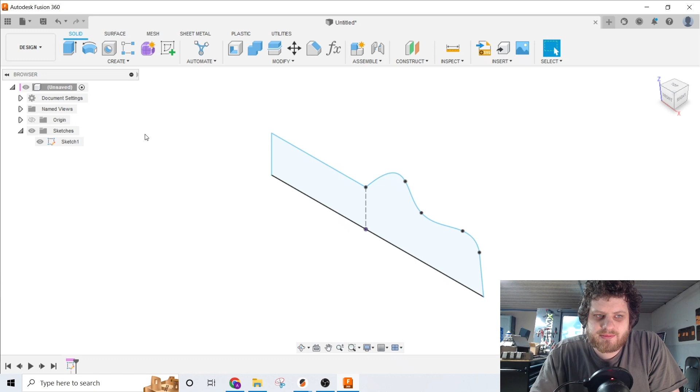Hey everybody, this is the Revolve button, and this is what it does. In short, the Revolve tool takes a two-dimensional sketch and rotates it around an axis to make a round shape. When you first pull up the Revolve tool, there's only a couple different options that you can choose from, and today I'm going to go through every single option that the Revolve menu gives you.

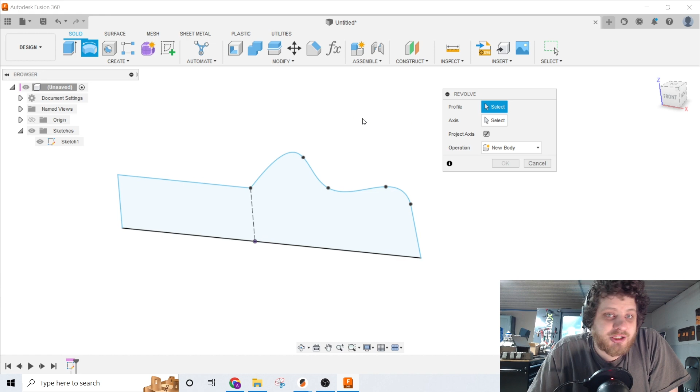So first of all, you need to select a profile. In this case, a profile is just a fully enclosed sketch. You can tell if your sketch is fully enclosed because Fusion will shade it this light blue color, and when you hover over it, it'll turn dark blue. To select your profile, you can just click, and you can also select multiple profiles if your sketch happens to have them. Then you need to select your axis that you are going to rotate your sketch around to make

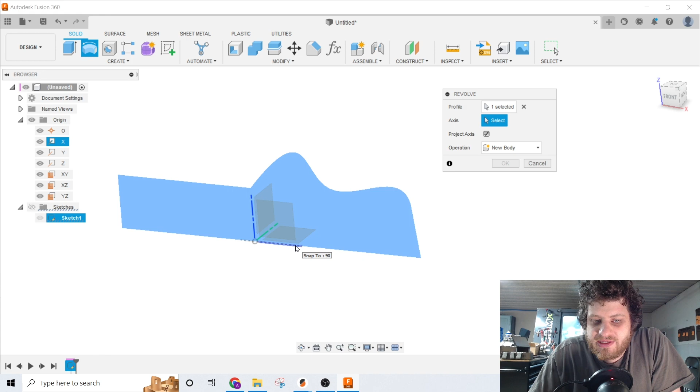your spun profile. Now this axis can either be a line within your sketch, like this example here, or it can be a piece of construction geometry, like this x-axis here from the work coordinate system, or you can even choose an axis from an existing piece of geometry, like a cylinder. Now your axis does not need to be touching your profile. In this example, you can see we have our axis down here, and since it's not touching our circle, we get a really big donut.

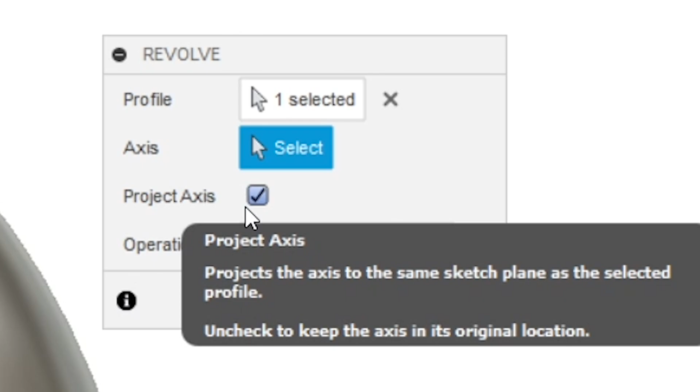Our next menu option is this little checkbox here that is labeled Project Axis. And this can be a little bit confusing at first until you see it in action. So if we look at this little donut I made here and we look at it from the side, you can see that the center axis is right in line with this plane that's defining our little circle there. So the circle and the line, the center axes are all lined up.

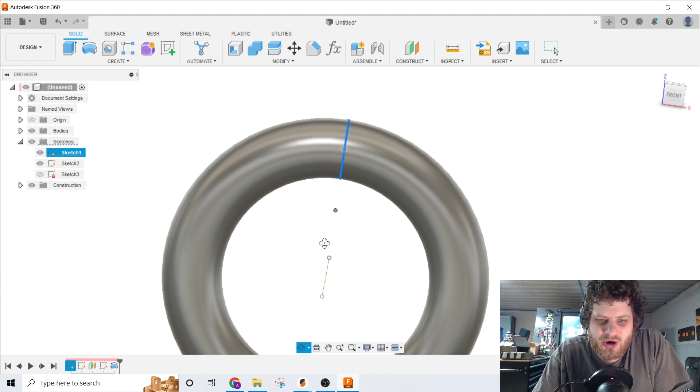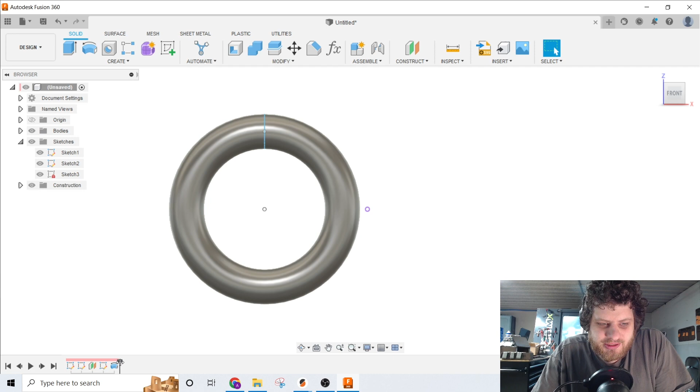So if I were to do a new revolve and I uncheck the Project Axis button, and I'm going to select this little line right out there as our axis, you can see that it made a much bigger donut, and also the cross section of that donut isn't quite round. But if I go back and delete this first revolve here, and do the exact same thing again with the Project Axis button checked, you'll see that I have my same original donut.

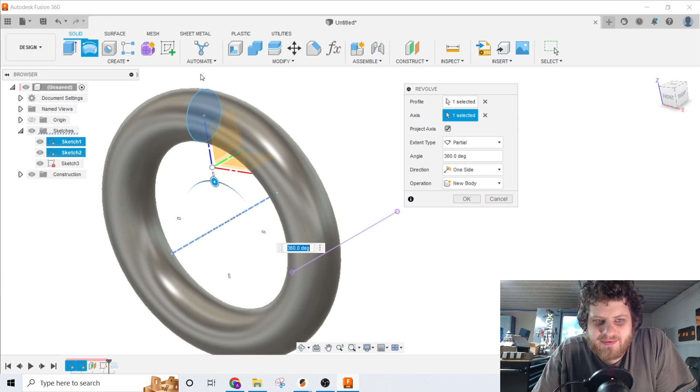If you have the Project Axis checkbox checked, it will move your axis line to be lined up with your profile sketch, as if they were drawn in the same sketch or on the same plane, like my original example here. Now this Revolve feature can do more than just adding more material to your model. It can also remove material.

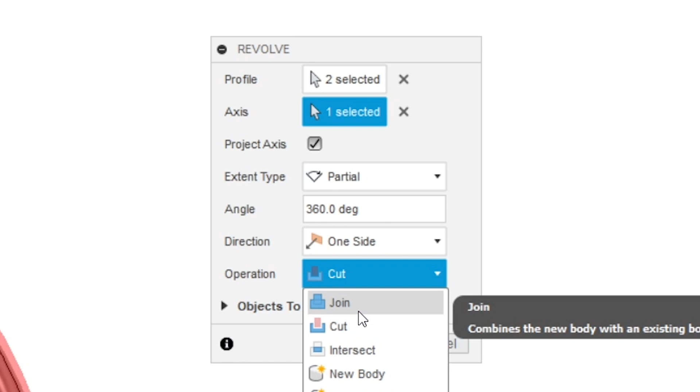So let's say we wanted to put a little groove in our donut here. We can select that profile I just made and then the same center axis. And down here, it'll pop up some more menu options, and we can select cut instead of join. And if we select cut, it'll cut a little groove into our donut. If we wanted to add material to the donut instead of removing the material, we can hit join, and you can see it'll add what kind of looks like an O-ring around the outside of our donut.

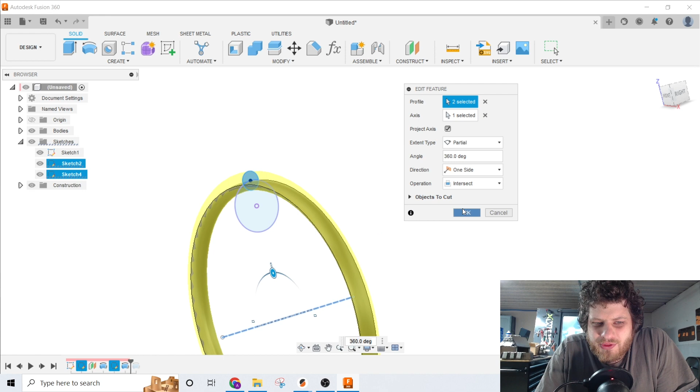We can also choose the option to do an intersect. Now, an intersect will remove all the material everywhere except where your new profile overlaps with the existing profile. In this case, on the outside, there's a large radius from our initial donut, and on the inside, there's a tighter radius from where we did that little cutout.

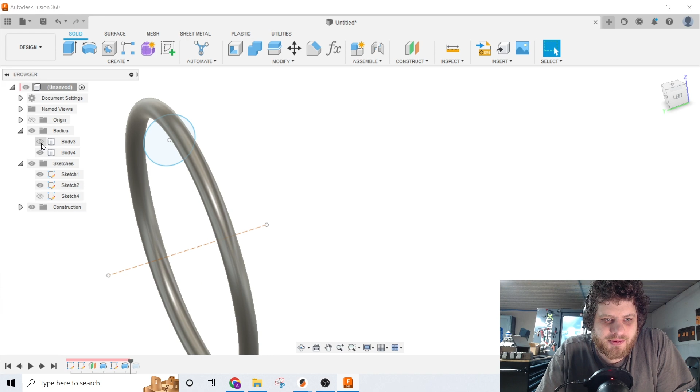And then, of course, you can select new body, and that'll create an entirely new solid that shows up separately on the tree over here that you can show or hide, or even use the move key to move around independently from your initial model.

Now, as soon as you've selected a profile and an axis, Fusion pops up some extra options for you. This first box labeled Extent Type will let you choose how far you want the rotation to go. So for example, if you go to full, that's basically everything we've done up until now, it'll go a full 360 degrees. But if you choose partial, it'll let you type in an angle.

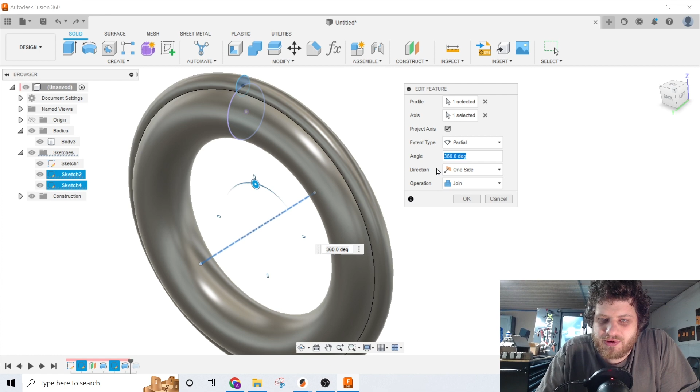So let's say we only want to go halfway around the circle. I can type in 180 degrees there. And now you can see that our little bump on the side of our donut only goes 180 degrees. If we change that to two-sided, you can choose a start and a stop angle. So let's see, we can do 90 degrees and 45 degrees.

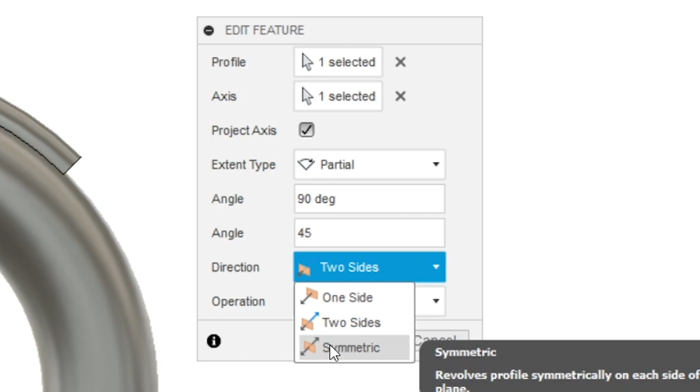And if you look at the top here, you can see that to the left, it extended that 90 degrees, and to the right, it extended that little feature 45 degrees. You can also make it symmetric, so that it goes the same in either way. So we can do 45 degrees on each side, giving us a total of 90 degrees.

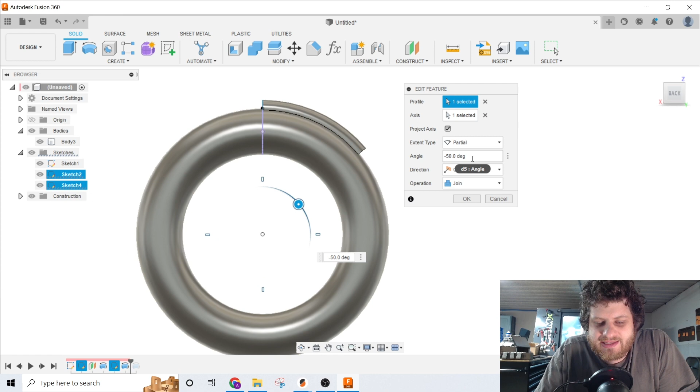Now, one thing to notice here is that in this orientation, a positive number will always give me material on the left. If I want to go to the right, you need a negative number on your angle. And of course, you can always just drag it to whatever direction you want to go, look at the sign, and then do some fine adjustments there by typing in your precise number.

So let's say you wanted to make a groove between these two little cuts here on this donut. So I've started by drawing a new profile sketch that's on one of the faces. And then when I go to my Revolve, I can select that sketch and my axis. The preview will pop up with it being a cut all the way around, but we want to limit how far it's going to go.

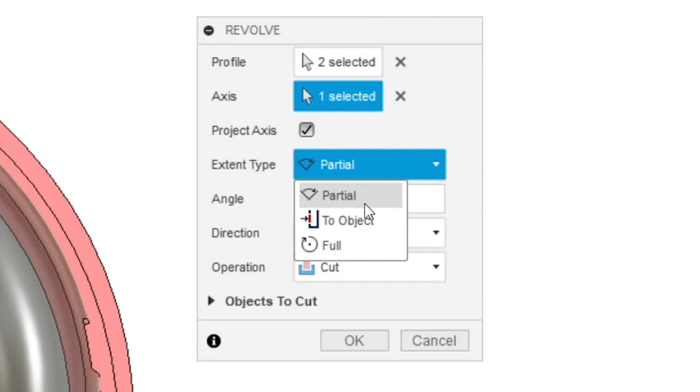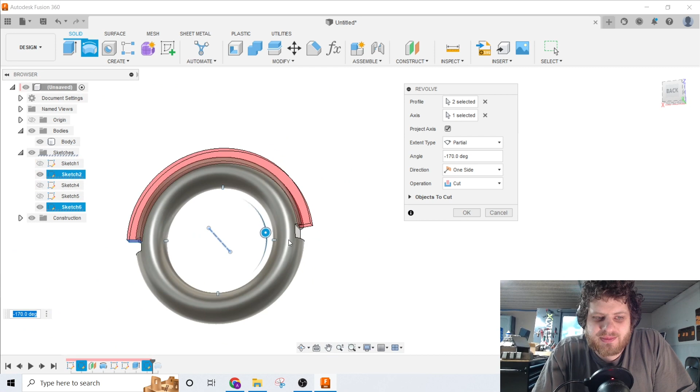Now there's a trick to this, because this to-object button is honestly pretty broken in Fusion. It does not work how you would want it to work. But what you're going to do is you're going to click on it, and then you're going to drag your preview to where it looks about right. You're close, but not necessarily right there. And then just click on your surface. That'll make the Revolve go the right distance to where it's matching that surface you just clicked on.

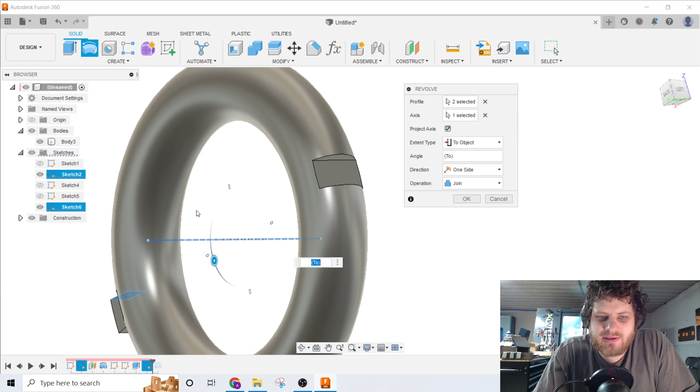Now notice over here, it changed my extent type back from to object to partial. I don't know why. It's dumb. It shouldn't work this way. But if you hadn't dragged it out first and you just clicked on your surface, it would go the wrong direction around the circle. So that's why you want to drag it in the right direction. You may have to go all the way around and then back. And then you can select your surface.

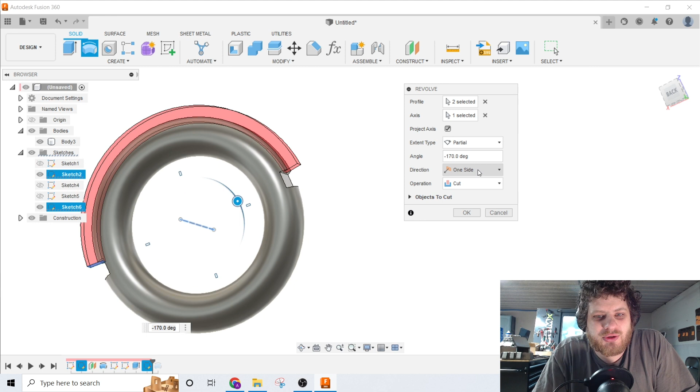You actually don't even need to click to object. You can just do this from partial. Fusion shouldn't work this way, but that's how they have it coded right now. And don't even try to do this as a two-sided revolve. It just doesn't work. And that is everything you need to know about the revolve button.

I'm sorry for the background noise. I'm running a CNC machine right there behind me, but this is the only place I can record these videos.